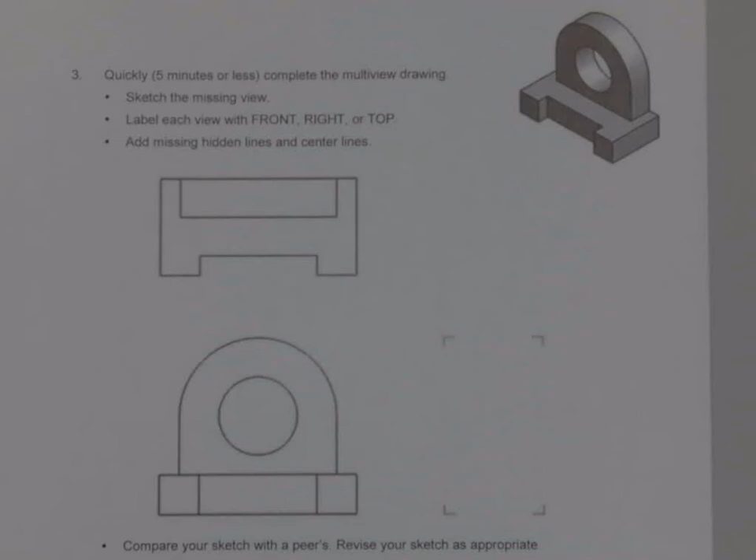In this video, we're going to take a look at doing another multi-view drawing, and here we got a few things to take a look at. Here's my 3D printed part that I used just to kind of help with visualization. So here's our front view for our part, which we can see. Here's our top view, and then as I go over, this is what our right side view is going to look like, and we are missing a right side view.

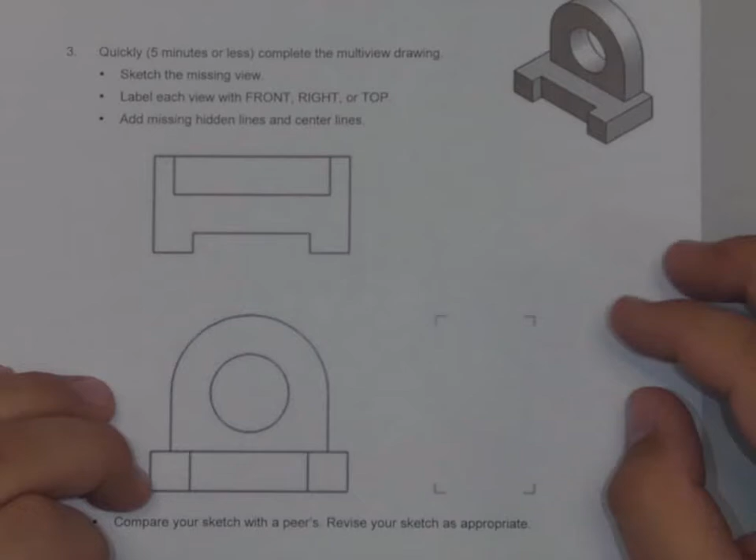So now what can I do? I've kind of moved my isometric up here a little bit, because I'm going to be projecting over here into this right side space. So one of the first things I'm going to take care of is transferring the height lines from my front view, any horizontal line or the top edge of a part, like on the arc, over into the space there.

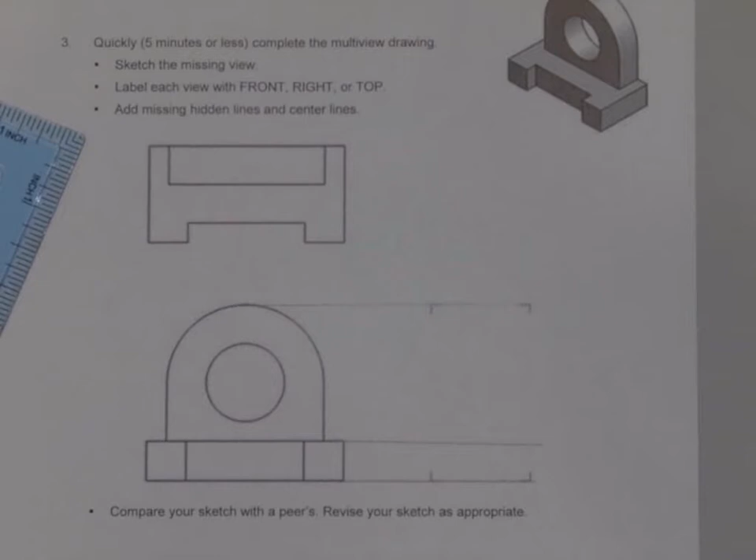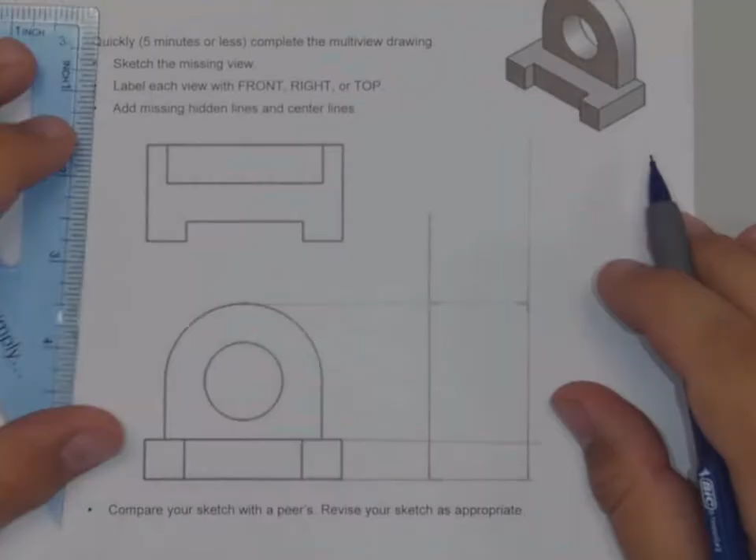As I go along, now I need to know how far the depth lines are. So this is where we use something called the 45-degree miter. I'm going to take lines vertically and project them up into this space, construction lines like this. The horizontal lines, I'm going to take them over until I hit these lines, like so. Now I'm going to erase this one a little bit.

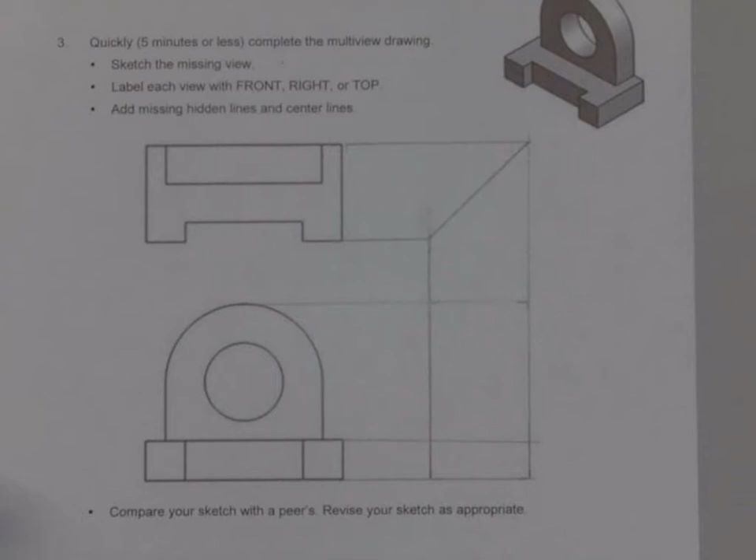And then I should have, between the two corners, a 45-degree miter line. What that is signifying is that as I go from the top view, I have to do a little 45-degree turn to be able to get that right side view. So kind of doing it like this, or if you go this way.

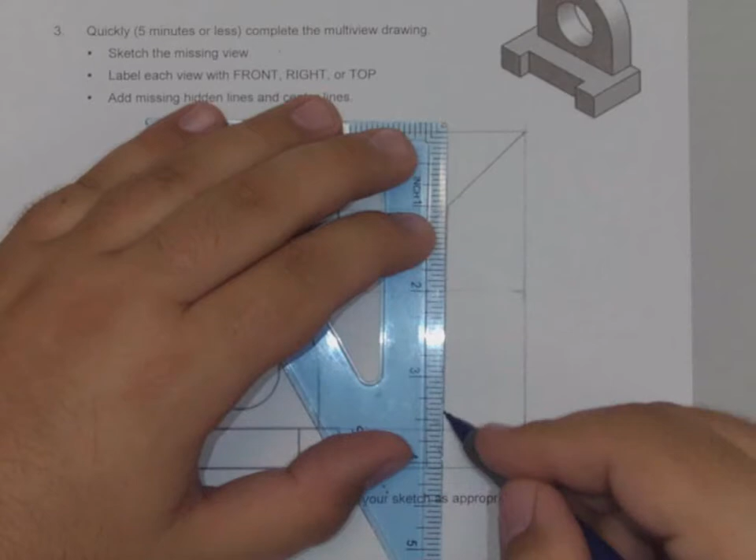So every feature that I have, like the little cut in, I'm going to line it up, go till I hit the 45-degree miter, and as soon as I hit it, from that point I'm going to project it down into my view. Same thing on the back of this upright. And that's going to help me set up my view a little bit.

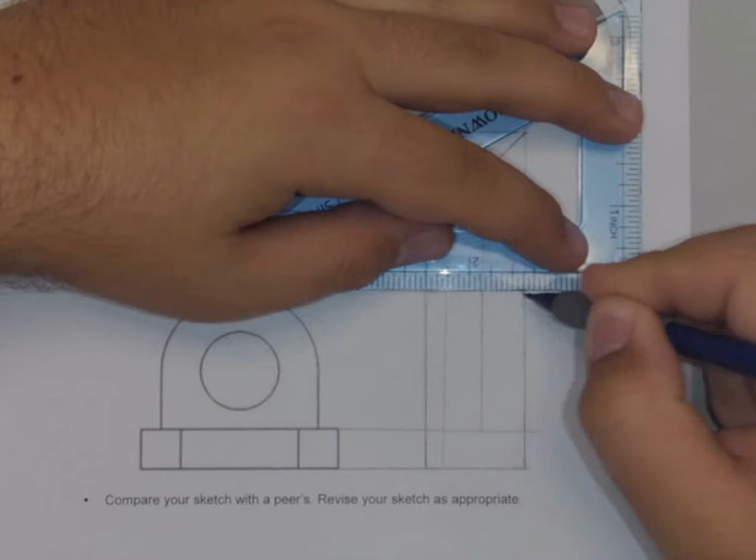Once I have that going, now it's just a matter of outlining some of my object lines. So we have this upright, kind of sits like this. Front. And then we also have it going across, making this little rectangle, which you would see the top edge of that line there. And that's going to give us the basic components.

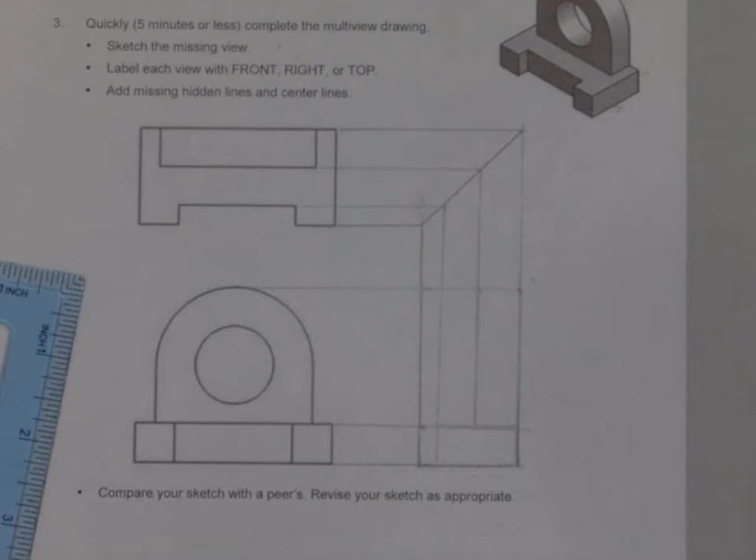However, here's the thing: that line from the front, when I look at it from the side, I can't tell how far back this little thing's cut in, so we're going to use something called hidden lines. I'm going to touch this with my eraser a little bit, and put in these dash lines. Those are called hidden lines, to note that I'm missing hidden lines on this particular part.

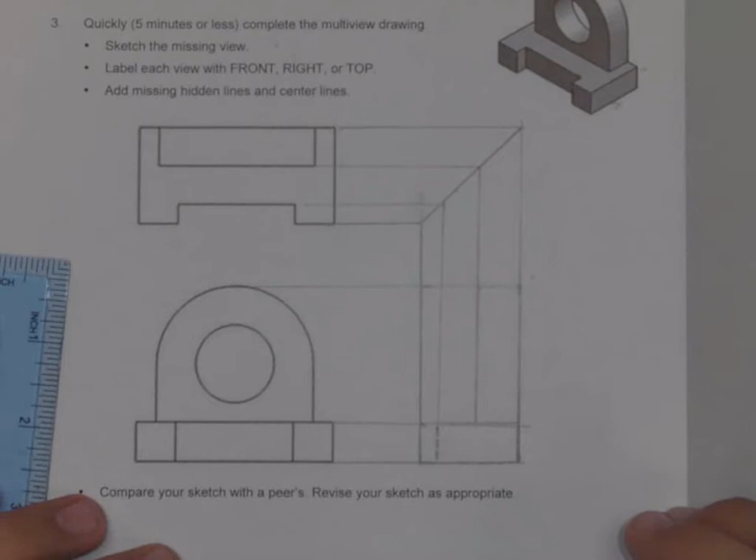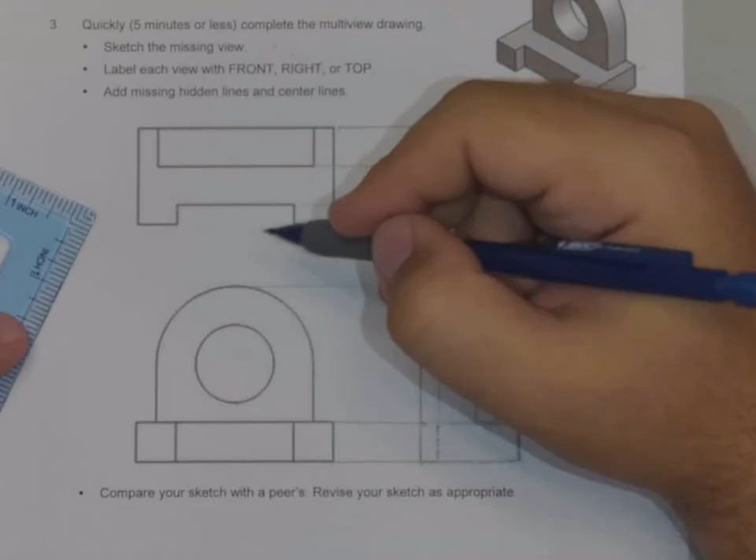Likewise, I've got a hole in here. When I turn from the side, I can't tell that there's a hole in that part. So same kind of thing, transfer over, do some dash lines for hidden, same thing here, and same thing here on the top view. So the top view is missing those hidden lines as well.

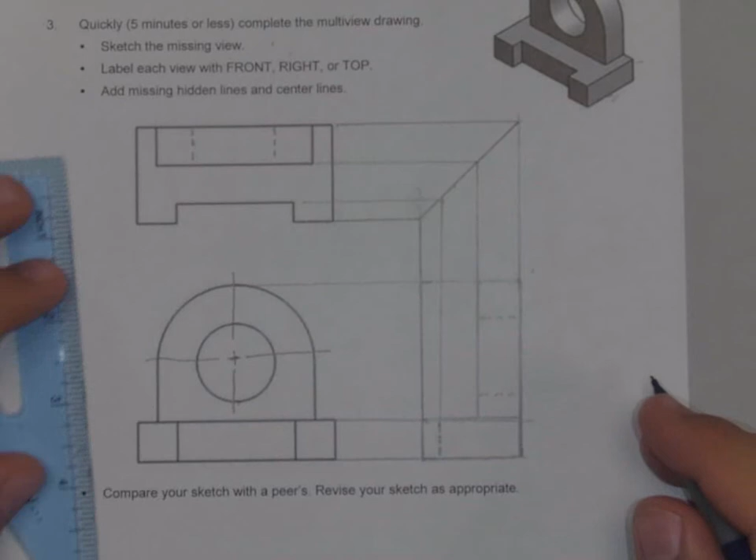Last thing is anytime we have circular objects, we need to have a center line, or center lines. This is going to be a center mark, to help us line that up. A center line is shown in other views, signified by a little short line and then longer lines on the other side with a little gap.

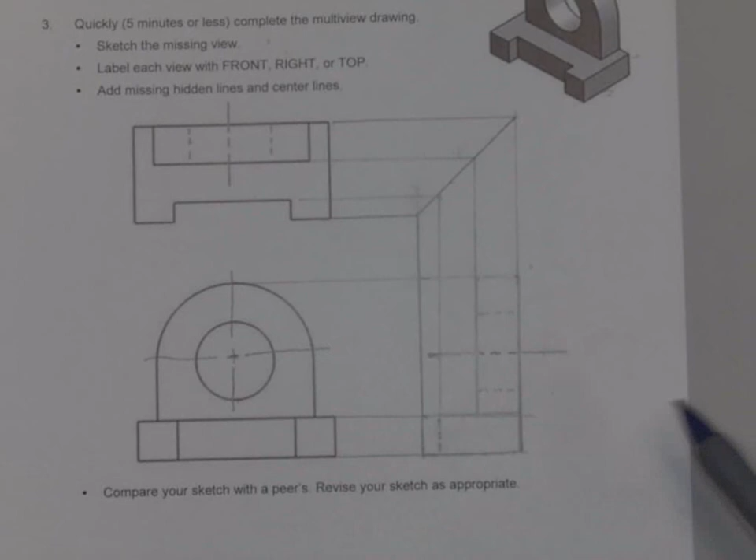And it's going to allow us to put in where those centers would be. So here would be the center line that gets put in there. So this finishes out the right side view for the shape, and this concludes our tutorial on multi-view drawing.